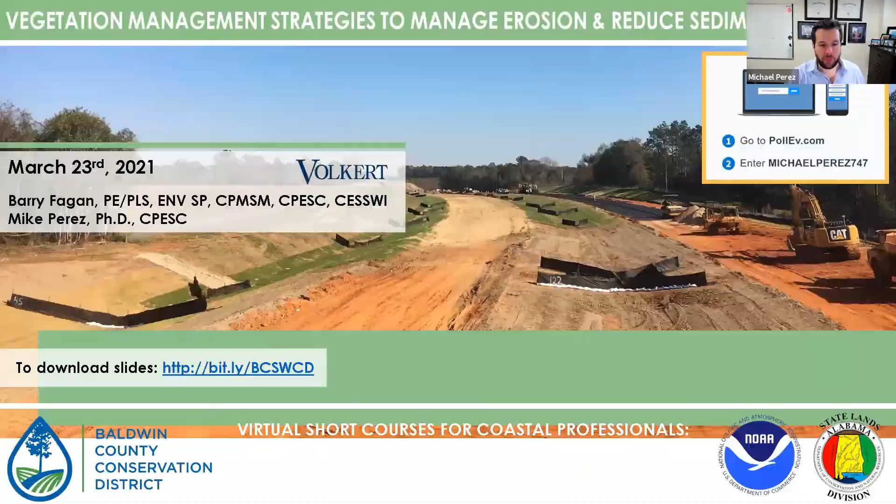So to get us warmed up with PollEv, we do have a poll question posted here, and I'm seeing on my screen that many of you have already responded. But this is just to get us warmed up. Go ahead and post where you're located or where you're joining us from, and it should pop up on this map if we get it to show up.

Barry, you might have to do this on your screen—if you scroll to the top right corner, there should be some options and you might be able to see it come live. I'm not seeing anything at the upper right. Would it be on the... Sorry, I'm not seeing that, Mike. That's all right, how about if I share my screen real quick and we'll try that.

Do I need to stop share? There we go, are you able to see my screen?

Yeah, okay cool. So I'm seeing that we've got a lot of responses, a lot of folks down in the Baldwin, Mobile County area, as expected. So great, it looks like the majority of you are able to respond, and it is working the way we intend. So that's good.

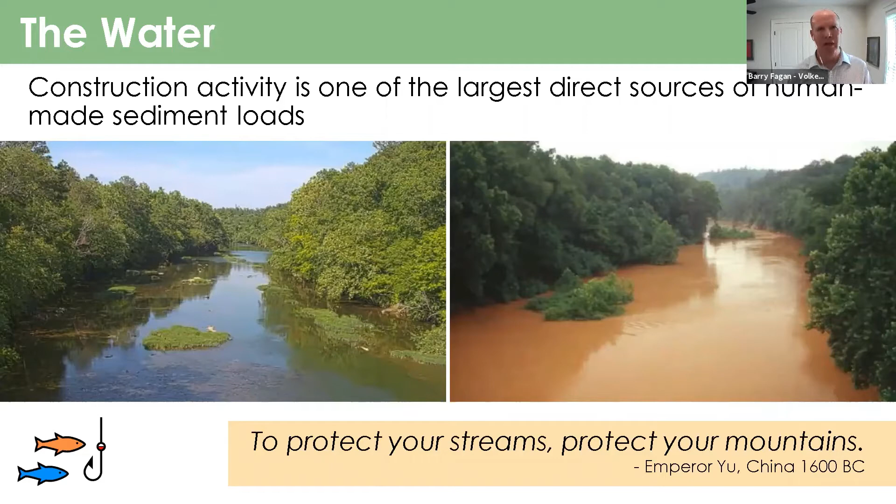And while that's a central Alabama stream, we know that we also have some issues down in coastal Alabama. We know that we like to blame the pollutants in Mobile Bay sometimes on the greater watershed and what's coming from places and people further inland, but we know we have issues there on the coast also.

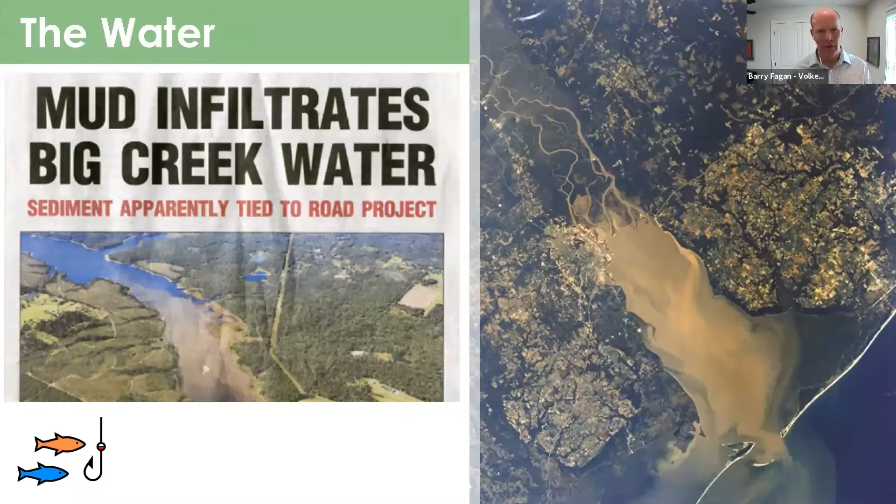So getting to the law now, the law of the land, the law of our nation is really the basis for the law is the Clean Water Act, and we're getting close to the 50-year anniversary of the passage of the Clean Water Act, and we haven't quite met the purpose for that act. You know, the purpose to restore and maintain chemical, physical, and biological integrity of our nation's waters.

We're barely getting the protection part down now. We haven't done the restoration part, and you can see the goals of the Clean Water Act to eliminate pollutants by 1985, to restore our waters to fishable and swimmable by 1983.

We missed the mark. You know, that Big Creek Lake, that drinking water supply that I just showed you, if you go fishing in Big Creek Lake, you're going to pass at least one sign that says, hey, don't eat the fish out of this place. Because of historic and past pollutants into the water supply, mercury and other pollutants. If you're going to eat...

Come close to restoring our waters to a condition that we were hoping for back in 1972.

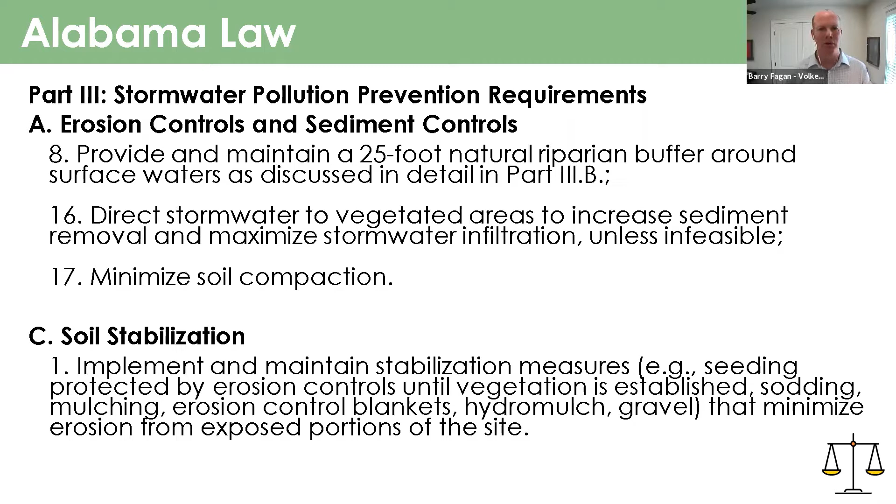It tells us to implement and maintain stabilization measures such as seeding protected by erosion controls until vegetation is established, sodding, mulching, erosion control blankets, hydro mulch, gravel. We'll talk about all of those today.

Continuing under that soil stabilization section, it requires temporary stabilization if an area will remain unstable for more than 13 days. That's not saying wait 13 days before you stabilize. That's the maximum. If you know an area is going to be disturbed and left for more than two weeks, stabilize it now.

Let's cover it up as a part of our getting out of that area. Let's cover it up now, at least with some temporary stabilization. There's really not a reason not to, but it requires some planning on your part.

And then once grading is completed in an area, let's cover it up with final stabilization right now. We can't wait till the end of the job. That's the old way of doing things, was you clear a project, you build the project, and then you come back in and stabilize the project once everything's completed.

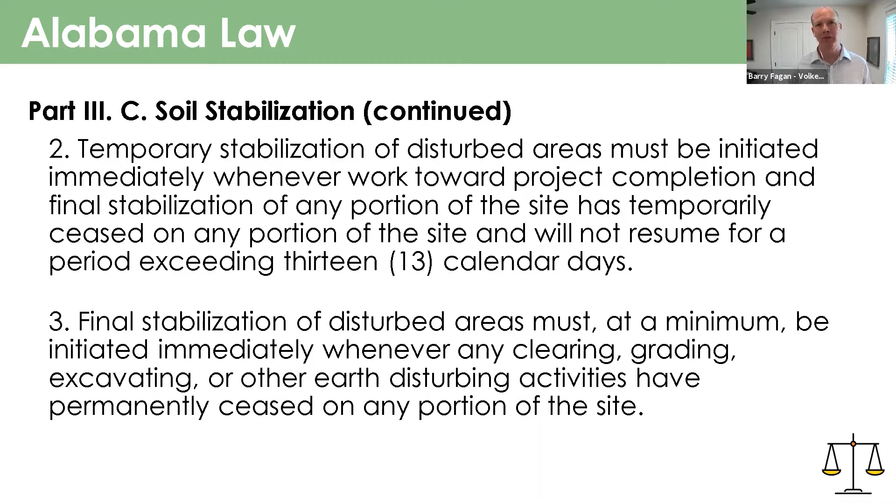That's what led to the problems on US 98 above Big Creek Lake, is 200 acres worth of disturbance and a contractor waiting till the end of the job to try to stabilize that site. We'll talk more about the concept of continuous pursuit of stabilization a little bit later.

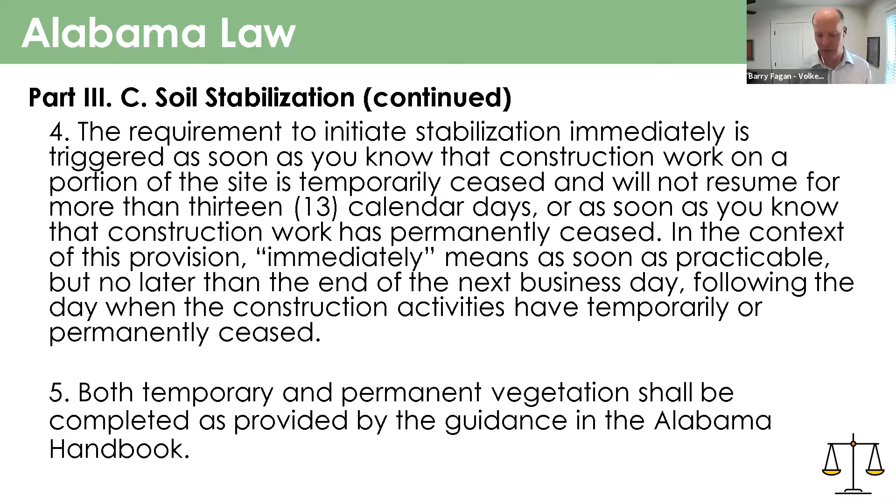So once you get the foundation for it, or maybe even the aggregate underneath the foundation of that building, you could probably go ahead and count that as permanently stabilized once you get that building started. Same way with building a roadway. You don't necessarily have to get to asphalt or a traffic stripe before you can call it permanently stabilized. It may be when you get your...

Describes, we're looking for perennial vegetation, and perennial means that the plant itself doesn't die with the season. It means that the plant lives on. It may go dormant for a season, but it comes back next year. And so a plant that doesn't live from now on, that would be called an annual plant.

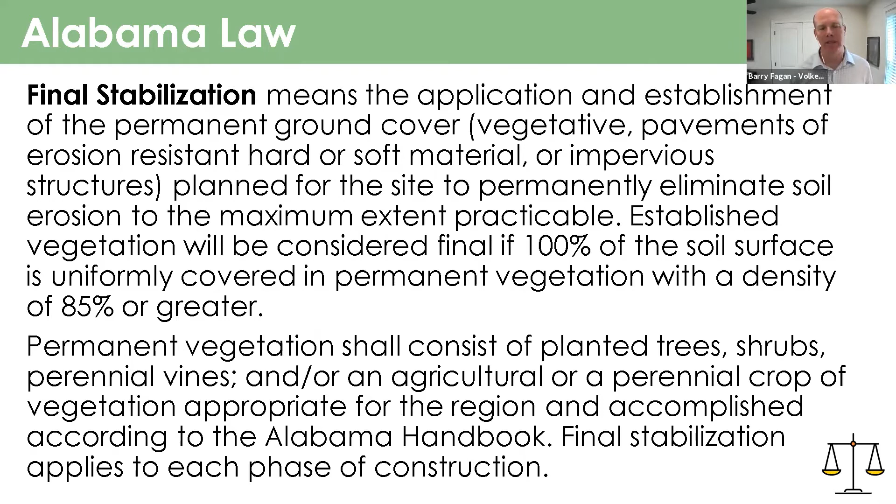If you're interested in that, you can look it up or get with me and I'll help you.

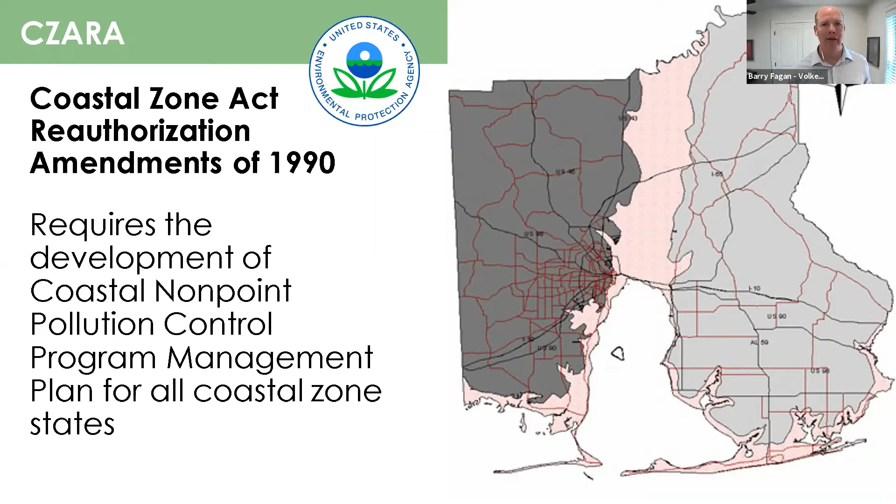There's the Coastal Zone Act Reauthorization Amendments of 1990 that have been in place for 30 years that require the development of a coastal non-point pollution control program management plan. That management plan has been in place for a while, updated along the way, and it's still in place today. A change to the new construction general permit is that the requirements of that management plan have now been highlighted and reinforced with the general permit. We're not going to get into all the details associated with those enhanced requirements for Mobile and Baldwin counties, but I would encourage you to take a look at that new permit and make sure you're comfortable with those changes related to your counties.

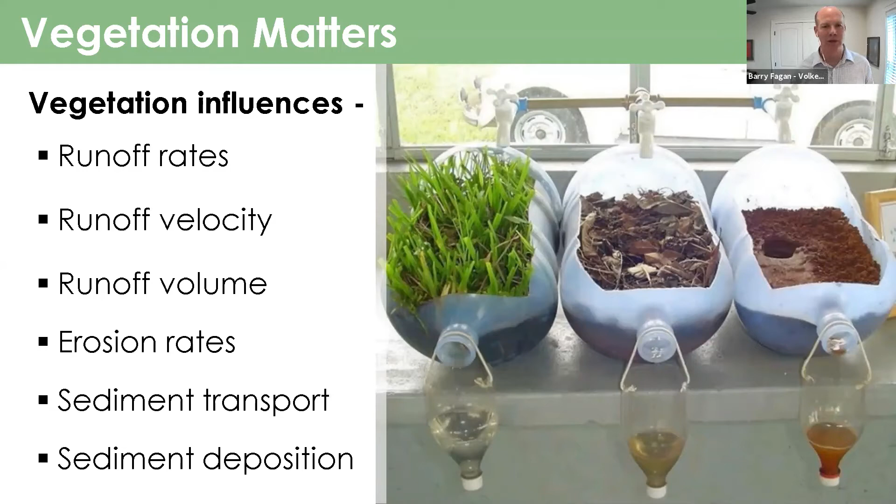Vegetation slows water, and slowing water is a really good thing. We know that just by reducing the velocity of our runoff, we can reduce erosive energy, reduce the size of the particle being transported, and also reduce the overall mass of the sediment being transported. We can increase the time of concentration, which is slowing water, and we can do that through the use of vegetation. So if we can't keep all that dirty water that's trying to leave our site, if we can just at least slow it down some, we can get some pretty good benefits just by running it through some vegetation to slow it down.

As we're trying to model the rates, velocities and volumes of runoff from a particular area, we can also see the benefits of vegetation. The runoff coefficient C in the rational method relates to the amount of runoff from precipitation received, and it changes with vegetative cover. It's a larger value for areas with low infiltration, and lower for permeable and well-vegetated areas. So as C goes down, so does Q, the rate of runoff.

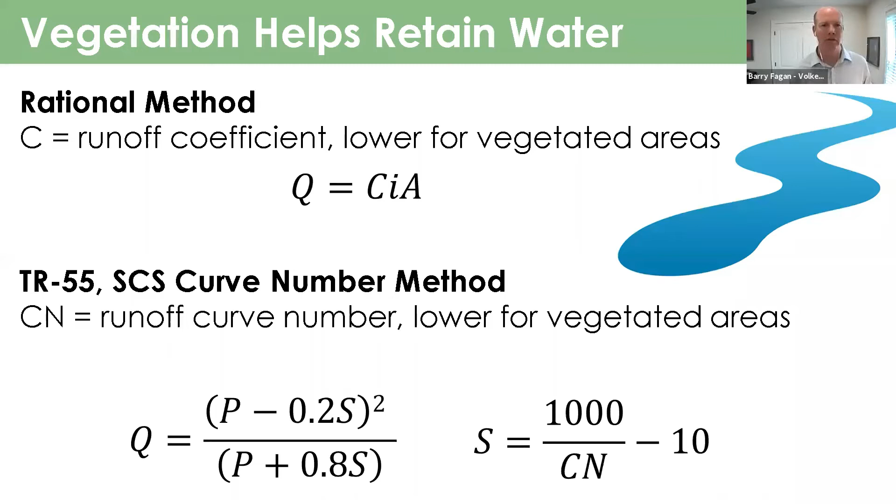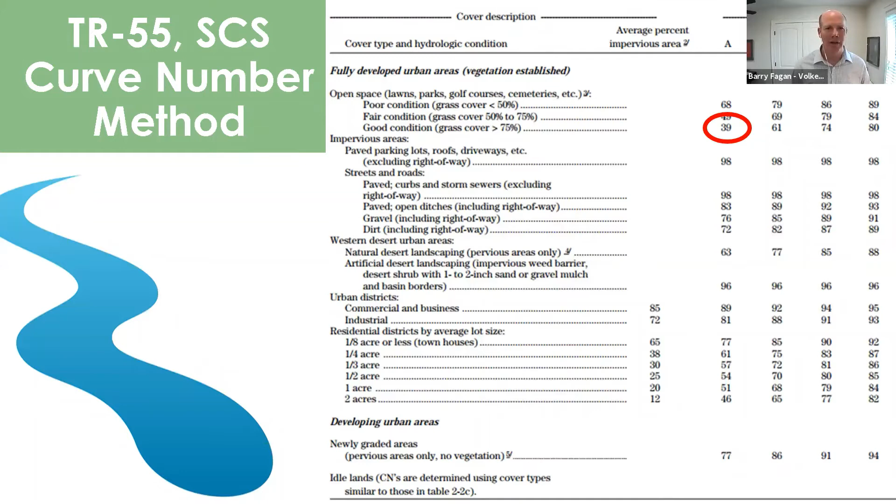Also, as we model the amount of sediment that might be leaving our site, whether on an annual basis with the Revised Universal Soil Loss Equation (RUSLE), or for a particular storm event with the Modified Universal Soil Loss Equation (MUSLE), the C cover management factor applies in both and plays a big role in judging the amount of average annual soil loss with RUSLE, or the total loss from a specific rain event with MUSLE.

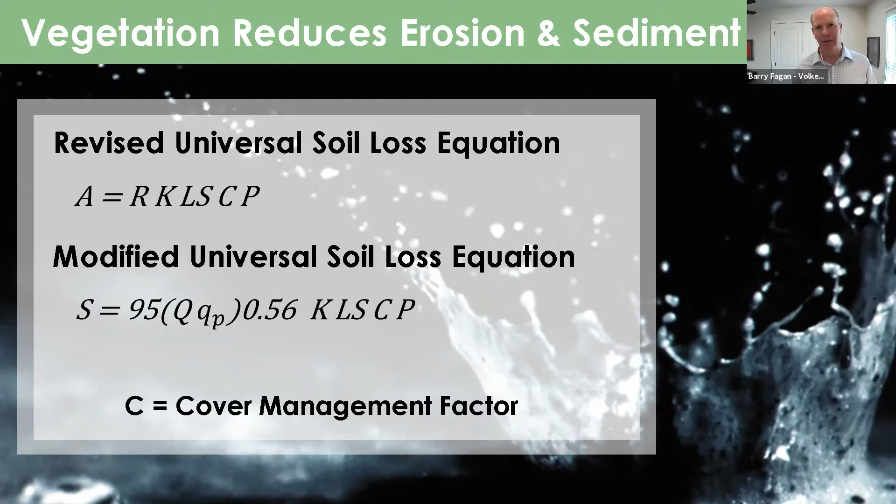C starts at 1.0 for bare land and goes down from there depending on the type of cover you put out there. So as C goes down, the amount of sediment leaving your site also goes down.

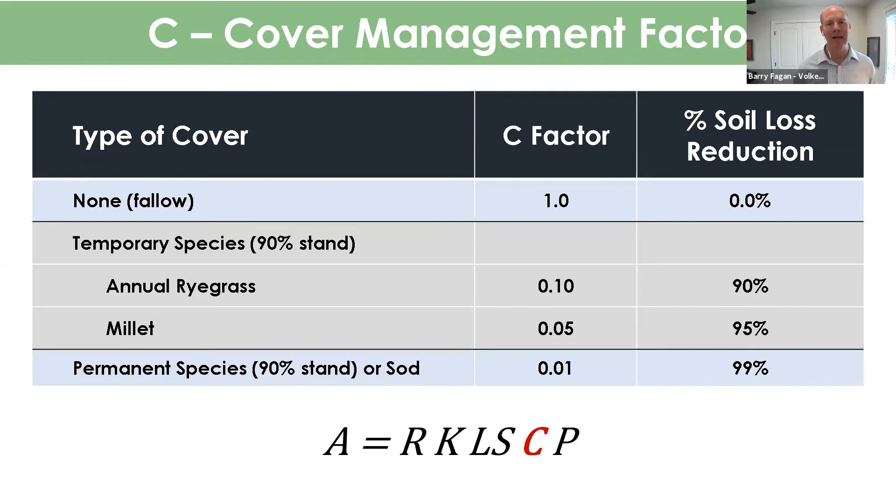That's huge. Compare your site to your neighbor's site—they're not worrying about establishing vegetation, but you've already got your sod laid on the slope. All other things being equal, your site is losing 99% less sediment than theirs.

Mike went over our objectives for today, and one of those was to explain the function and role of vegetation within a comprehensive stormwater management plan. Mike Shelton mentioned earlier that the topics of these three workshops were thoughtfully put forward, judged, and contributed to by professionals in that area.

But we have to remember it's not all about managing sediment, and it's not even all about managing erosion. Those two areas of stormwater management are really part of a bigger, more holistic and comprehensive stormwater management plan. So let's look at what that might look like.

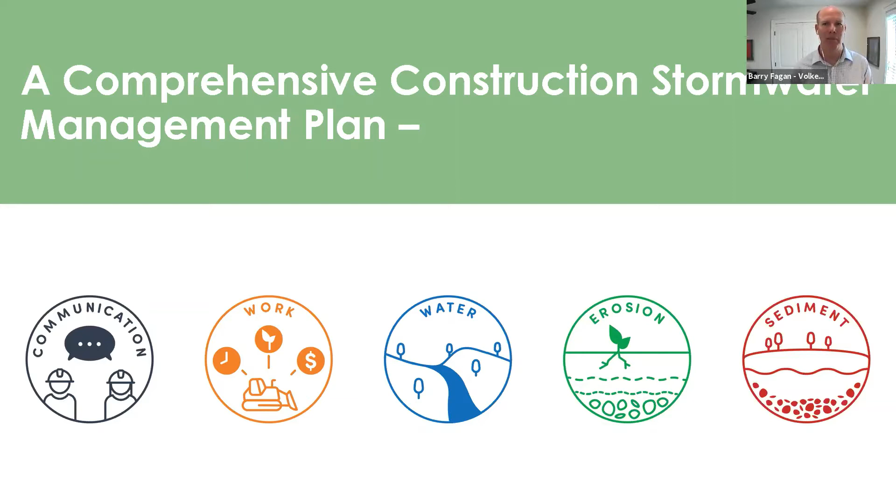It started with a focus on what we thought was the problem, but turned out to be a symptom of the problem. We saw our sediment in the creek, our sediment in the pond, our sediment in our neighbor's yard or in the church parking lot. And so we went out to...

Thank you. So we started out focusing on the symptom rather than the source of the problem—looking at sediment in the creeks and the ponds, neighbors' property—and realized that if that's all we're focused on, we'll never win.

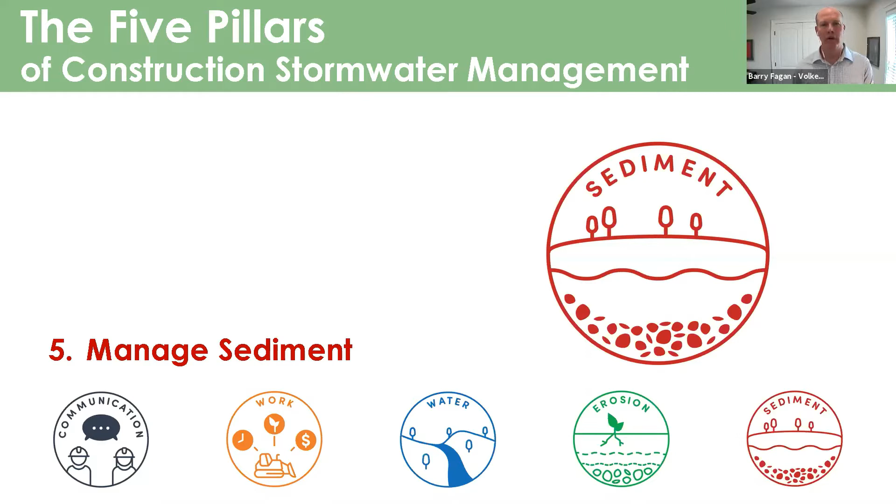And so we started looking at where that sediment was coming from. And we realized that if we could keep the soil particle up here on the slope from becoming detached, we don't have to work so hard down here to try to capture that soil particle.

And in Alabama, most of the time, it's water. And so we can tackle water by at least limiting the amount of work we have to do to those raindrops that fall on our project. So we can take the water that's coming to our project.

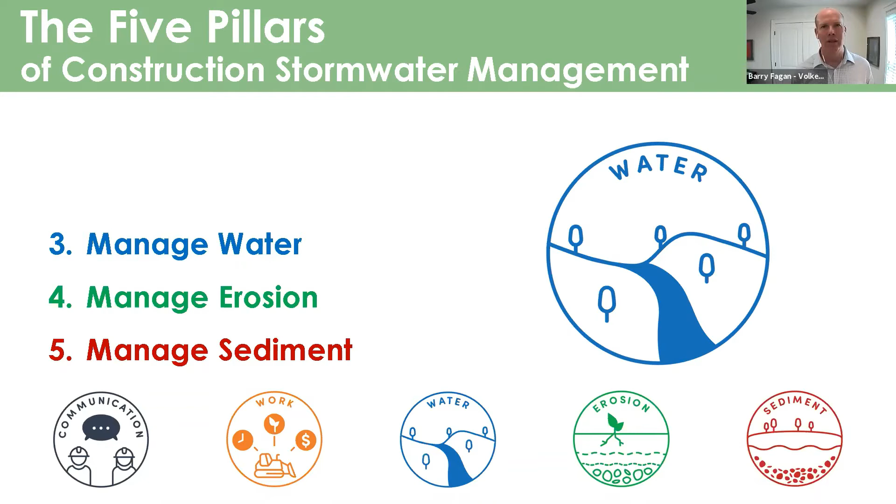To prevent the raindrop impact, to prevent the sheet erosion, and then manage the sediment that might come along with that. And then somewhere along the way, we realized that our contractors are way smarter than we were giving them credit for being. They're smart, they're innovative.

And they are willing to do just about anything we ask them to do, as long as we tell them up front as they're putting their bids together, and we're willing to pay for it, which we are. They can do just about anything we ask them to do, but we have to ask them. We have to tell them. In many cases, we have to say, this is how we want you to do this work.

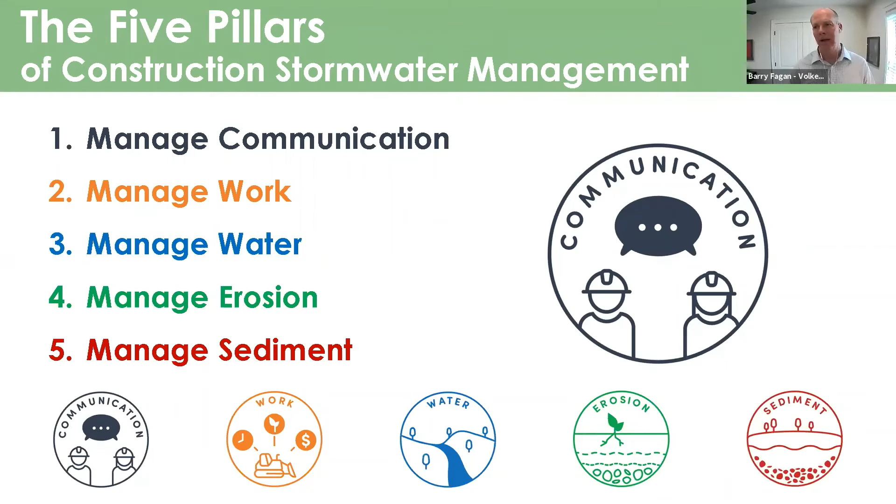And so managing communication was kind of the last thing that evolved of these 5 pillars. It's now the most obvious, but if we're not managing communication, it's going to be very difficult to be successful in these other areas. And so we call communication the best management practice we have available to us. We start there and work our way down, and it so happens that managing communication is the most effective practice we have available to us.

And when it comes down to it, if you're not doing the other 4 pillars, managing sediment actually becomes one of the least effective practices we have available. And it's also the most expensive if you're not managing the other 4 pillars along the way. And so we encourage you to adopt all 5 of these pillars and work them in order to increase the effectiveness of your managing sediment practices, and also to reduce the cost of trying to manage that sediment.

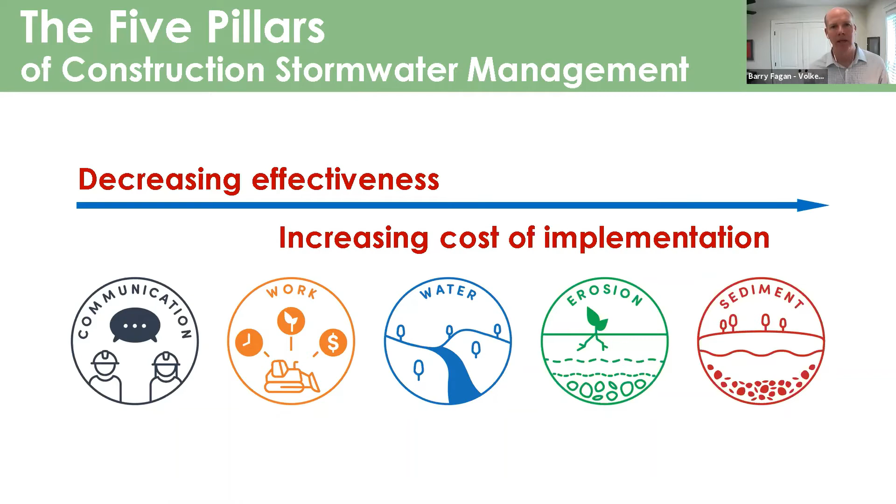So in terms of managing vegetation, with communication, we know that specifications, plan notes, pre-bid, pre-construction meetings, all of those can provide direction, they can provide clarity, they can share with the contractor what our priorities and expectations are for this project before they ever put their bid together for the project.

Managing work, the timing of vegetation is critical, and it's a part of managing the work of a project. When we choose to clear and when we choose to cover, those decisions do make a difference. And so we should choose to limit and delay our disturbance at every opportunity. We have to communicate that to our contractor through our plan notes and meetings and conversations.

And then as we get to managing water, we know that vegetation slows water down, and slowed water is good water, right? Erosion, we just saw that vegetation can give us a 99% reduction in sediment yield just by establishing that permanent cover. And then even the general permit acknowledges that vegetation can provide sediment filtering and sediment capture. We absolutely need sediment management as a part of our plan, but the work of that plan can be lessened if we're managing vegetation along the way.

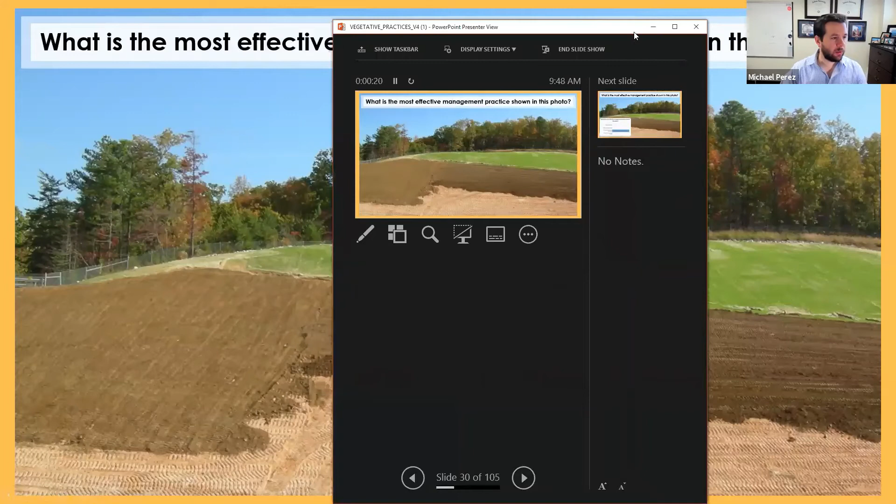All right, so the question is, what is the most effective practice shown on the screen? Is it topsoil application, vegetative establishment, limitation and delay of soil disturbance, or the rolled erosion control product that's installed?

Here you can see the results coming in from the poll, and the majority of you, about 65%, are agreeing it's vegetation establishment. But Barry, I would argue that it might be the delay in soil disturbance and the limitation in disturbance. Yeah, I was watching to see if, after you said that, the numbers would start going up for limitation. Let me get back on here and explain that question a little bit further.

So looking at this photo, taken on the Anniston East Bypass project on ALDOT several years ago. ALDOT has requirements for establishing vegetation as the work is being carried forward. So as a contractor cuts 20 feet into a cut, they have to start establishing permanent vegetation, then 20 more feet have to do the same thing. Where I'm standing taking this photo, we still haven't reached the subgrade of the roadway, but you can already see green grass growing.

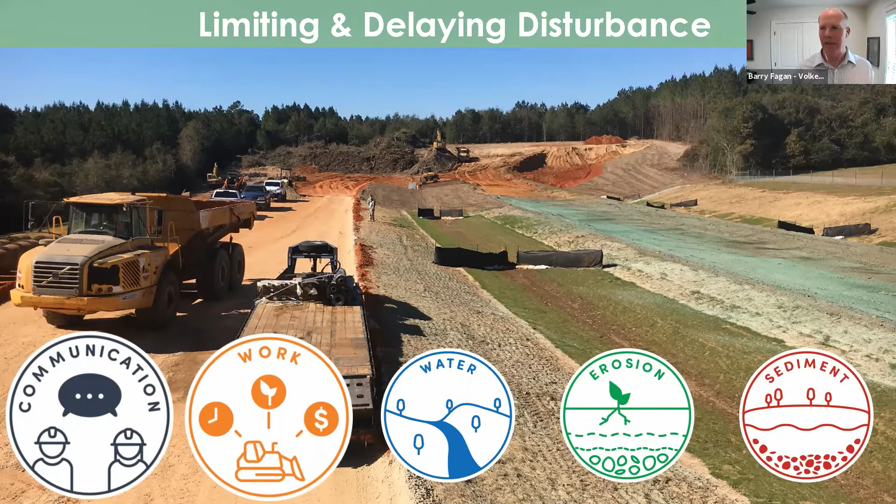So we've delayed disturbance in that area beyond the trees, and we've limited the area of disturbance here where we're working right now. Of this 15,000 to 16,000 foot long project, we only have this small area of disturbance out there, and that greatly reduces the sediment load. So not all areas of our site need to be cleared.

Now this is a roadway site. We'll look at a commercial or residential development in just a second, but you can see the area between our construction limits and the right of way. Is there a reason to clear that? Maybe if there are utilities there, or if we have to install a fence, maybe there's a reason to clear it. But I think oftentimes we just simply clear from right of way to right of way, or property line to property line, just because that's what we do sometimes.

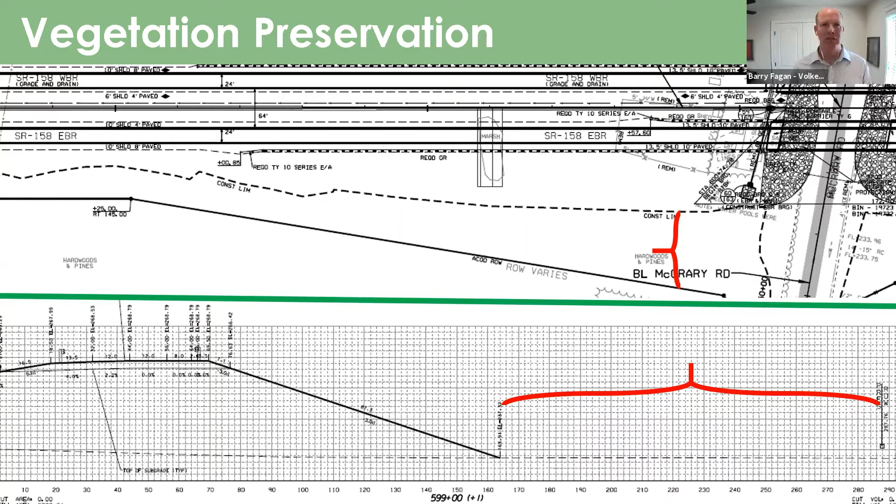But no—every square foot or half acre of established vegetation you save is sediment loss that you also save down the road. So take a look at this residential development.

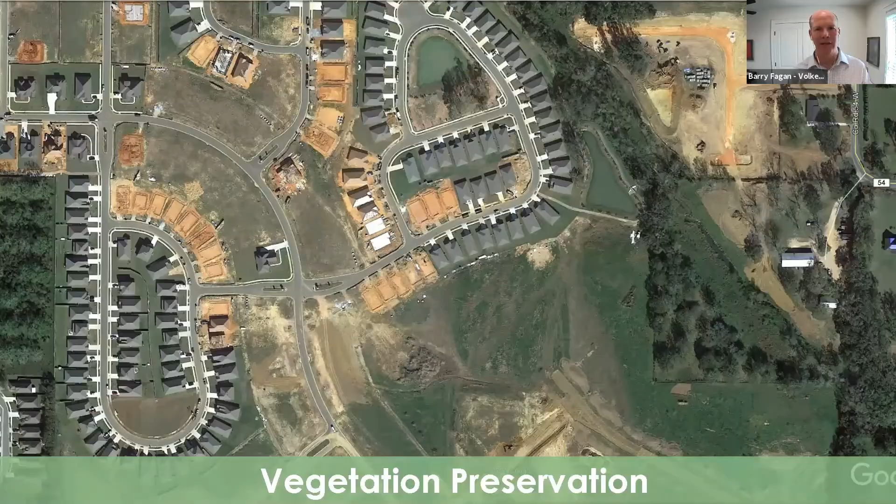It's inconvenient. This is another roadway project I'm part of. You can see we've got the jug handle roadway access road coming in from the top, and the main line there on the bottom. What do we do in that area between those two roadways? There's no need to clear that, no need to strip that whatsoever. But if we just leave it as is, we know what's going to happen.

There's a shot that I really like. Behind me is the source of soil for this embankment that's being constructed. In front of me, the contractor had a 17-acre limitation on the area of disturbance, so he cut a road through the woods to get from his cut section to his fill section, limiting his disturbance, but also delaying the disturbance of that treed area on either side of the access road.

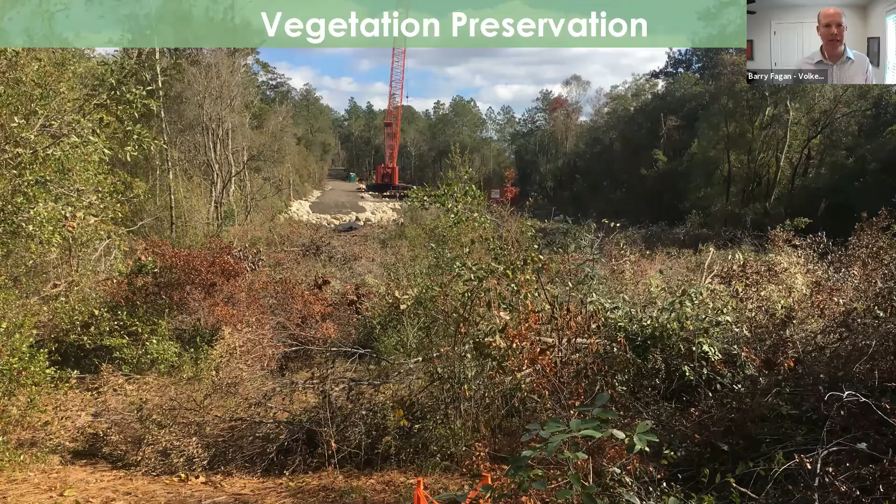There's some minimal clearing at a bridge construction site. You just get so many feet outside of the bridge overhangs, and then let that be it. There's no need to clear from right of way to right of way. So, back to communicating, we have to let our contractors know that we don't want them to clear in a certain area, and sometimes that takes signage, and sometimes it takes a physical barrier.

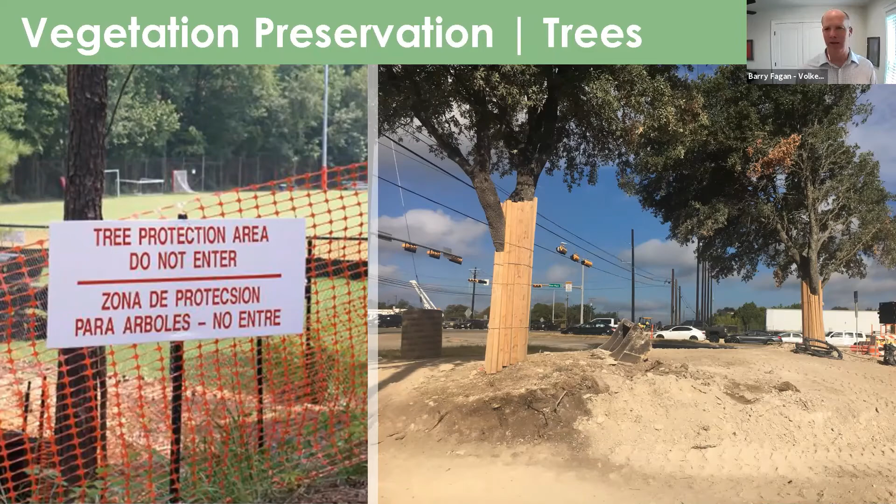I was on a project in Texas last year and noticed they were doing a really good job protecting the bark on the tree, but you can see the root systems are just completely being dug into there. I think these are some type of oak trees. I can't imagine them being okay with that type of damage. Typically we should think about preserving the roots within the drip line of a tree, and if we can't do that, that tree may not make it.

Some other factors we need to be thinking about: even if we've preserved this tree and we're not going to excavate around it, if we start parking up in there and storing materials, before you know it that tree has been damaged, or at least the root system or the soil around it has been compacted, and we have issues. Sediment deposition is another problem as it starts to build up above the roots and up on the tree trunk.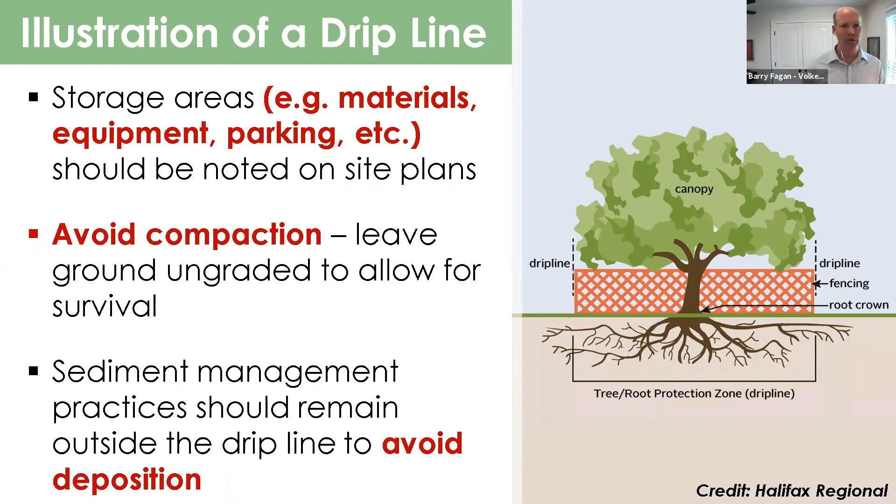One thing I've been fooled by before is contractors saying, hey, we're not going to clear that area, we're just going to go in and log it—we just want to harvest the timber, and Barry, that's a pretty clean operation. Well, it's not. Loggers can make a really big mess of a site, and what you're left with is a commitment maybe that you've made to a regulator or to some other stakeholder, and now you're left with this truly disturbed site.

Now, it's not as disturbed as had they gone in there and cleared and grubbed it traditionally, but there's still a problem there, and we'll see ruts and a lot of exposed dirt with a timber harvesting operation. There are some practices we can employ, but trust me, those loggers, they can wait.

Their operations are pretty mobile these days, and they can mobilize pretty easily and quickly, even though they'll tell you they can't do a second operation. They can.

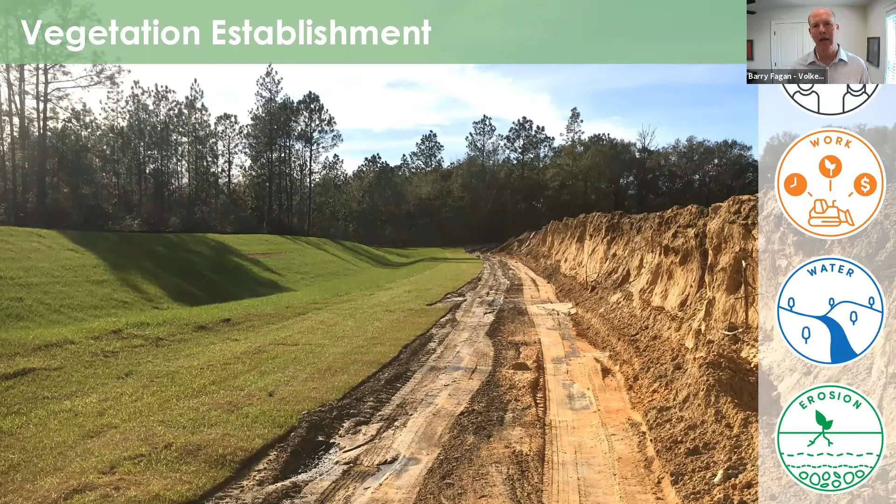They decided, let's go ahead and get this ditch graded, get our sediment controls in place, and let's cover up at least this buffer between us and that creek. And then we'll finish excavating on the right side of the road a little bit later.

As we give ourselves some cushion between ourselves and disaster, there are some considerations and questions we need to be asking ourselves during the planning and design process, and also along the way.

So what's the desired permanent species? Again, we're looking for that perennial plant. Do we need a nurse crop? Do we need a cover crop? We'll talk about those terms a little bit later.

So when is the best time to plant? Can we schedule our project to fit planting schedules? Sometimes that's not reasonable.

When I'm up north, they talk about the winter season or the rainy season, and they'll actually shut contractors and construction down during those times. We don't do that here in Alabama. We don't have a rainy season or a season that we really can't work. We work year round and deal with the elements we deal with. So we have to know.

So I'm working today at the end of March - which species can I seek to establish right now? Or if I'm in August, which species do I need to be looking at establishing at that point? Are our soils suitable? Have we done some testing to see if our soils will actually maintain? We can get grass to grow just about anywhere in Alabama, but it may not last very long if our soils aren't suitable.

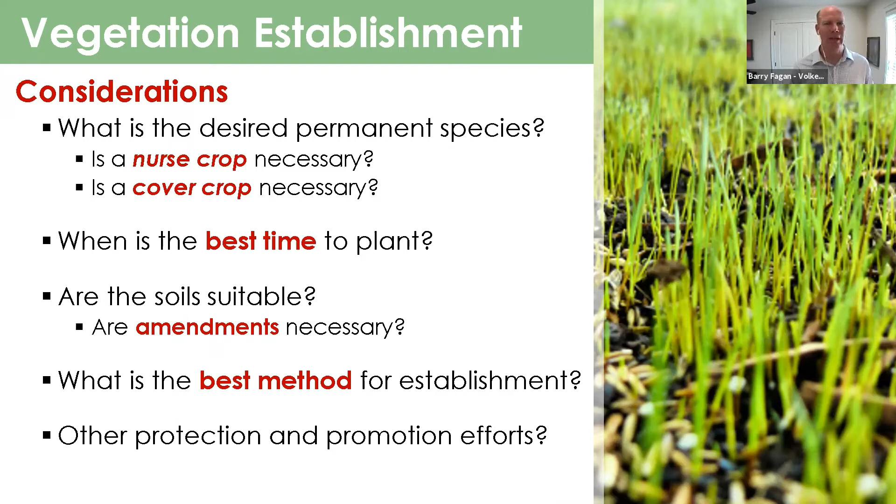And then also ask ourselves, what's the best method for establishing that? We'll talk about some of those methods of establishment in a little bit. Like I said, in Alabama we have pretty good climate, pretty good soils. Topography can be a challenge, heavy rain can be a challenge, sometimes periods of drought can be a challenge. But on average, we have some pretty good conditions for growing grass.

So with climate, we think about average temperature and rainfall. With long-term land use, we're thinking about the appearance. Is this a front lawn of a Taco Bell, or is it the front lawn of my house, or is it 300 feet off the roadway? What kind of traffic is going to be on this slope?

Are we just going to be mowing it, or is there going to be foot traffic? How often are we going to mow it? Do we want to - do we need to maintain a certain height of vegetation, say in a solar facility, large scale utility scale solar facility - that will influence the type of vegetation we try to establish, and then our soils and topography.

If we're dealing in sandy soils, we may not want a clumping type of vegetation. Maybe we need more of a creeping vegetation, so we're not creating channels for the runoff to go through and carry that sand. All of those things come into play, but the good news is we don't have to make all those assessments ourselves - there's some really good resources out there.

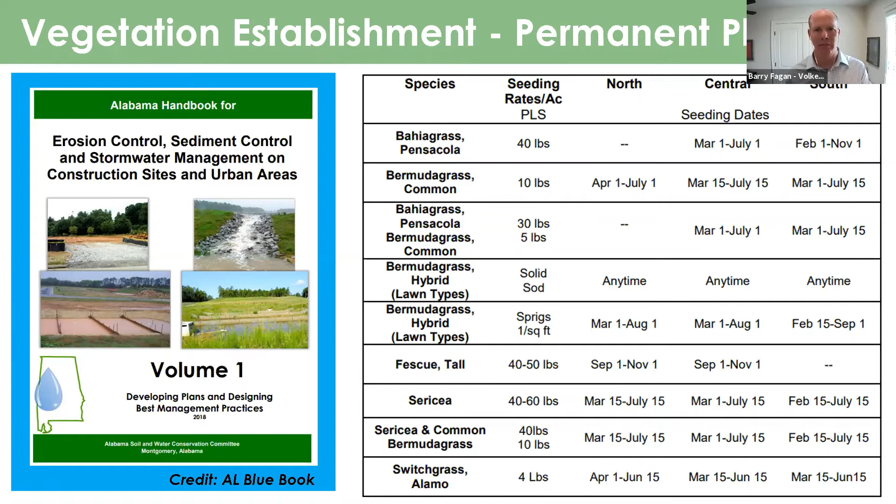But those aren't often established by seeding. I tried to establish centipede once by seeding and went back to sod pretty quickly. Notice that there's a north, central, and south column over there on the right side. You're obviously in the south part of this table.

And so there's not just a region, there's also a planting date as part of this, and then the rate of seeding goes along with the species and plant selection also. One thing to note, if you look at Bermuda grass, it can be established just about any time of year by solid sod, or by sprigging February through September. There's some species like tall fescue you could probably establish in your area right now if you planted it, but it wouldn't last there very long.

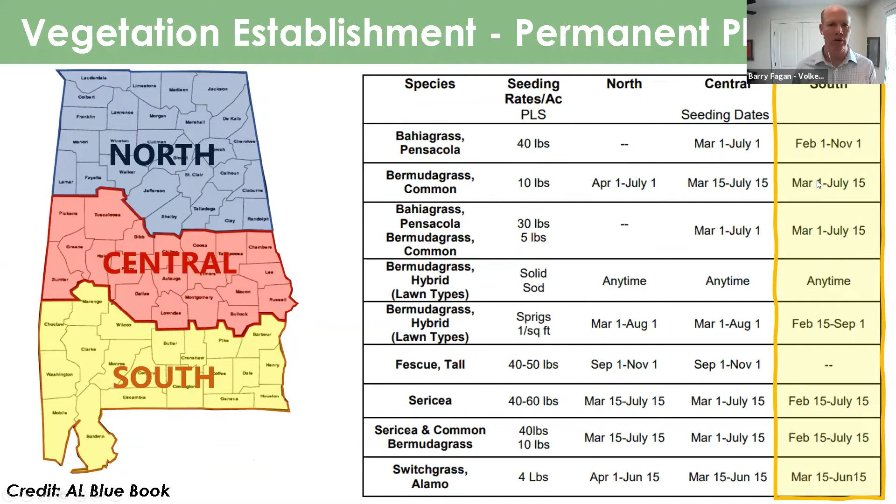Also notice that there are some gaps in here. We've got March to July 15th. So what do you do if you want common Bermuda grass planted and you're at August 31st? Well, you're going to have to establish some type of nurse crop to help hold the world together until we can get around to a decent season.

At my last house, we had about 2.5 acres, and part of the yard was really shaded. My kids didn't run around in that part of the yard very much, so I planted centipede there, while the rest of the yard I was able to plant and establish Bermuda grass. That worked out fine for me. I didn't have to mow the centipede as often, and the kids didn't tear up the Bermuda grass, but it was a little bit more expensive to do that in the shady areas. So economics play a role in your plant selection also, and Mike will show us some cost information a little bit later.

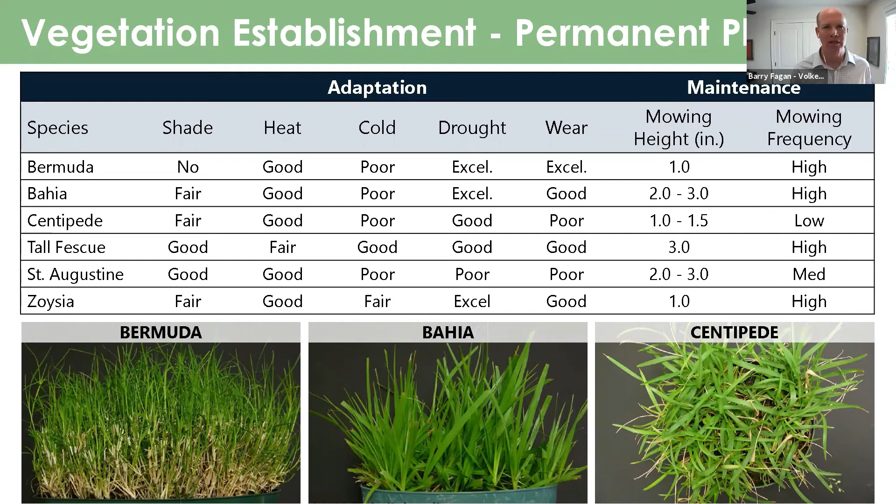Another good resource for selecting plant species is the Alabama Department of Transportation specifications. You can do a quick search to get to the specifications, and then another quick search within the PDF spec book to get to vegetation establishment, or seeding, I guess is probably what it's called.

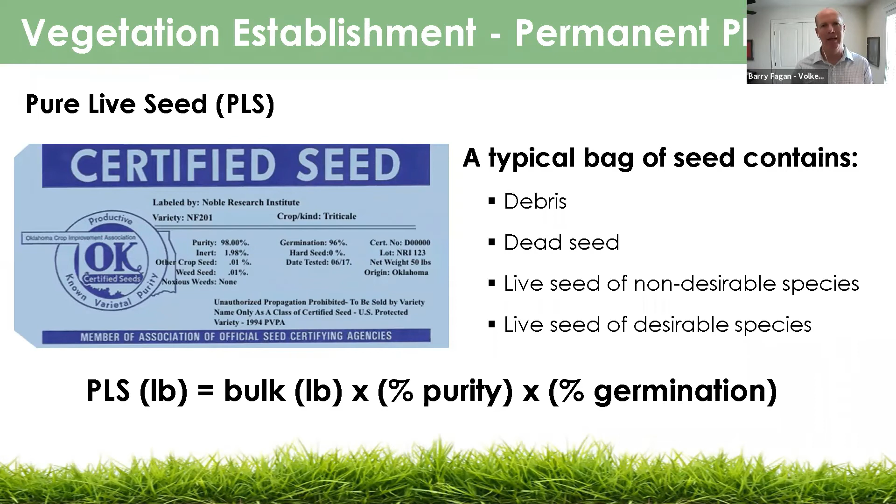You'll see on the seed tag that for this particular seed analysis, the seed was 98% pure in that bag—meaning 98% was the seed we were looking for. The germination percentage is 96%. So of this bag, 98% is what you want, and 96% of that will actually grow. We multiply our bulk, our mass, pounds of seed in the mix or bag, times our percent purity, times our percent germination.

I want you to do that quickly, looking at this seed tag with 98% purity and 96% germination. How much pure live seed is in a 50-pound bag? I'll pause a second while you do that calculation. It should be a quick calculation—it should have taken you longer to get your calculator than to do the math.

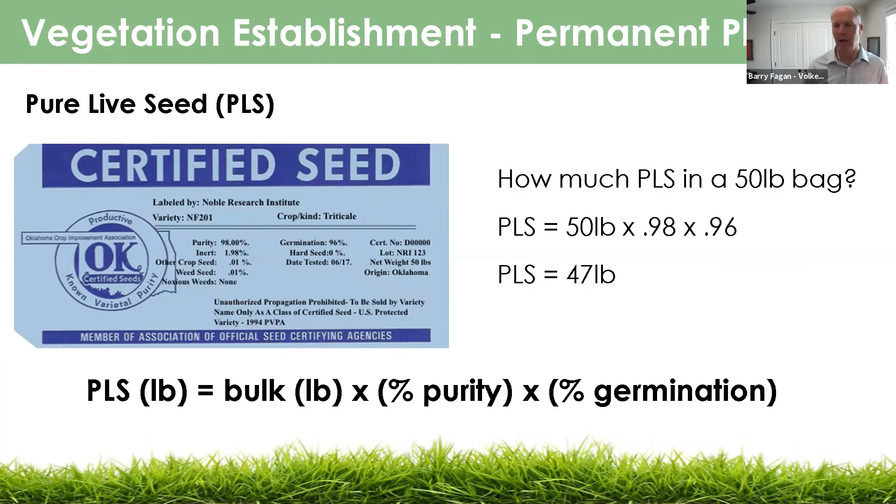We know that we multiply the bulk, the pounds of seed in the bag, times our purity, times our germination, and we get 47 pounds. These numbers, 98% and 96%, are pretty good numbers—maybe as good as you can get. But when we start seeing those rates get down into the 80s, it can make a really big difference in how much money you spend. If you're paying the same amount for this particular seed as for a bag with, say, 80% purity and 78% germination, then you're not getting what you paid for. You have to do your calculations to make sure your economy is working out.

So we talked about nurse crops and cover crops earlier. Just to clarify, nurse crops hold the world together while the permanent plants are being established. We may need to supplement a mix—if we've got a slow growing plant, we may need to supplement with something more fast growing, but that will die out as the seasons change and temperatures warm up. Those can also be knocked out with a herbicide sometimes. You get the ryegrass going, get the root system in there along with the other permanent species, then knock it down with a mower or herbicide, allowing maximum sunlight to reach your permanent plant.

Cover crop or temporary seeding is used in lieu of permanent planting. In those seasons or situations where you either don't want to or can't establish a permanent plant, you can put a temporary species out there, or a cover crop or temporary seeding, again just to hold the world together until you can get to that permanent planting.

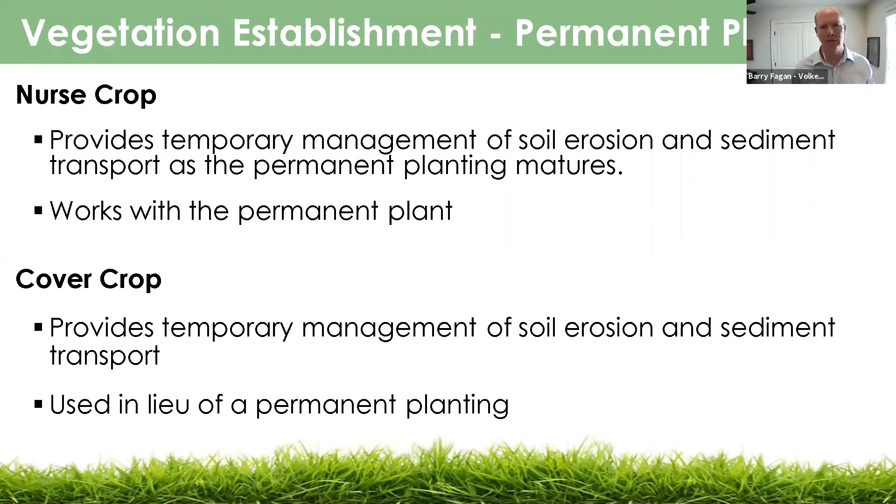I just noticed Perry gave us a comment. He said, also beware of seed testing dates, germination decreases with time, especially when improperly stored. Thank you for that, Perry. Yeah, that's my kind of luck, when they see me drive up in the parking lot, they go to the back of the warehouse to get my seed bags. But Perry's exactly right, take a look at the testing dates on that seed, make sure you're not getting old seed, because germination rates do decline over time. Thank you, Perry, for that.

It's cheap, it's easy, it grows really fast, it gets you a good green look really quickly, but then it seems to hog all the sunlight and the nutrients, and it makes it tough to get the permanent seed to come up from underneath or after the brown top millet is out there. I was in Birmingham yesterday and saw a slope where, probably two years ago, I saw brown top millet just covering the slope, and that slope today is still really struggling to get the permanent stand. We actually stopped including brown top millet in our seed mixes at Alabama about 10 years ago, because of overuse and a tendency to shade out those desirable plants.

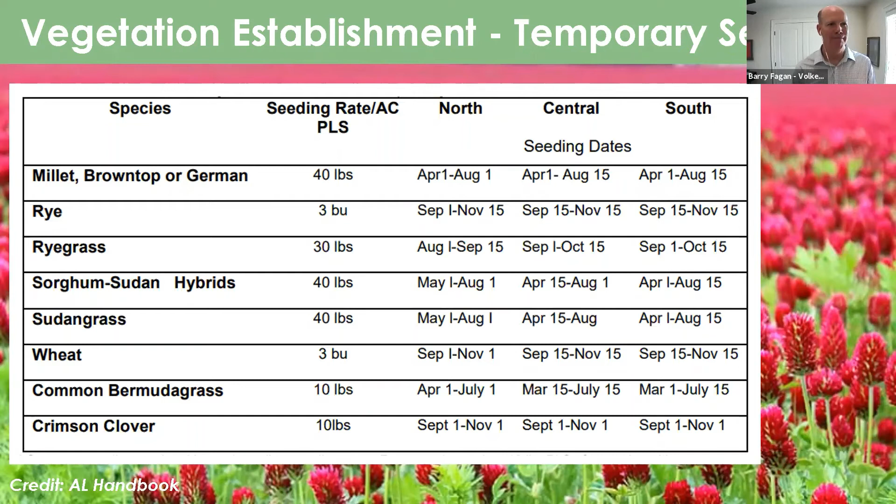He explained that it's an annual plant, so the plant itself dies at the end of the season, but it's also a reseeding plant. So the plants I was seeing were brand new, they emerged from seed from clover in the past. Not all clover is like that, some clovers are truly perennial, but if you're curious like I was about seeing crimson clover on this list of temporary seeding, that's the explanation. Thank you, Earl, for clearing that up for me and for everybody else on this call.

We lost you as you started talking on that slide.

So in the wintertime, when we had to get it covered up, we put out a temporary seed mix with some permanent species included. We put some unhulled Bermuda seed in there along with some Bahia grass, and in theory the ryegrass dies out and the permanent seed comes on through. But the problem here in Alabama is there's a little bit of overlap. So we kept watching starting in March, knowing that if we were going to have to overseed or seed and stubble this area again, say our permanent species did not come through, we needed to do that in the March, April timeframe.

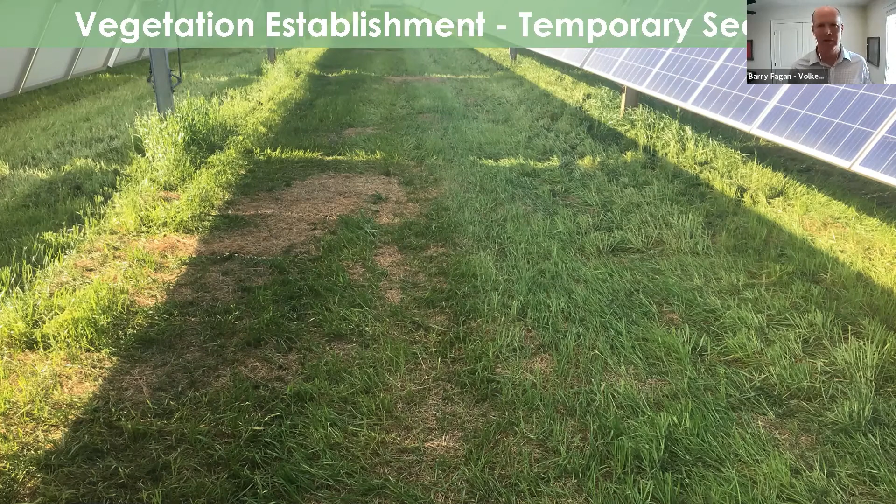But the problem is we couldn't get the ryegrass to die out fast enough to see if we were actually getting the emergence of the permanent species. So we mowed it and looked at it week after week. Eventually we started seeing some Bermuda starting to pop up.

It's hard to see, but these finer blades of grass down at the bottom, that's Bermuda starting to pop up. We've still got the ryegrass, but the permanent species were not coming through everywhere, so we had to come in and basically start from scratch, scratch up the surface and reseed our permanent species.

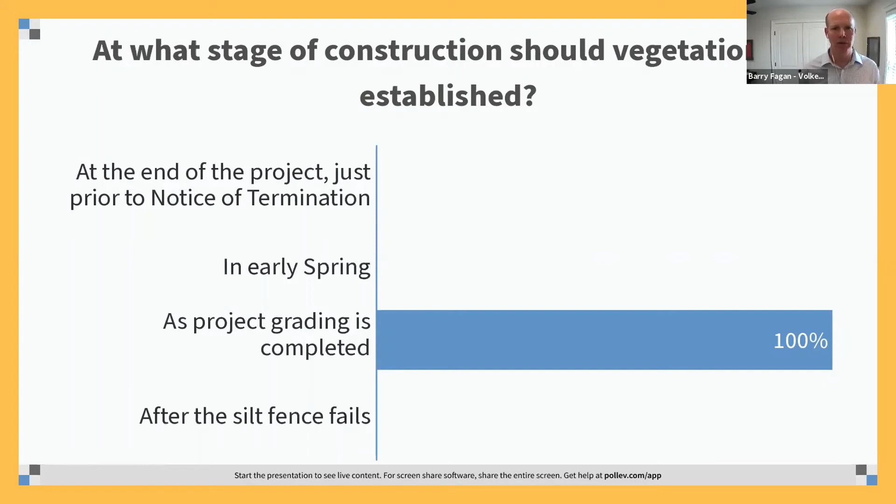Barry, I saw a question come in. Tracy's asking, how long can you store seed? When does it start to go bad, and when do you have to think about replacing the seed if it's been stored too long? That's a great question, but honestly I don't know the answer. Maybe Perry or Earl could weigh in on the chat box, that would be helpful. Hopefully we'll get you an answer soon, Tracy. For some reason I'm not seeing those questions in my chat box, but okay, I did see a comment from Earl that says temporary is an enemy. I appreciate that—all right, let's keep rolling.

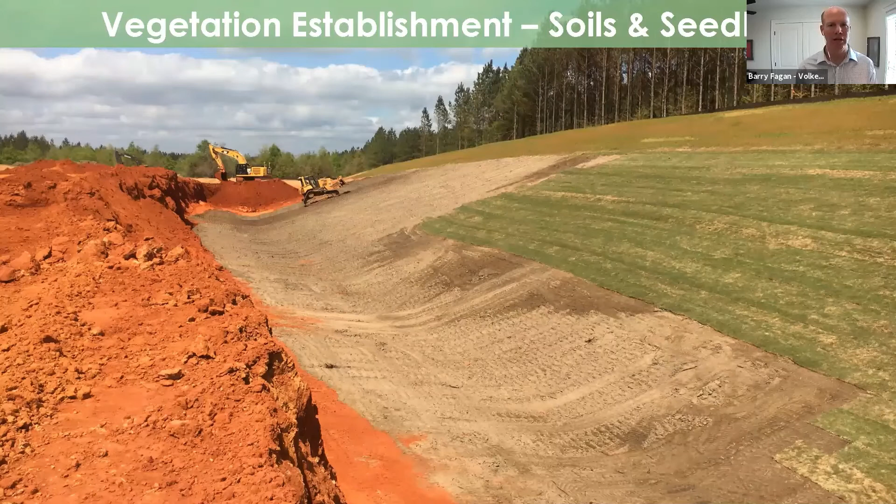That topsoil we know is good topsoil because it's been sampled and tested, and that effort pays off. We know topsoil is typically less erodible than the subsoil, and you can see in this area where we stopped our topsoil application and vegetation establishment efforts, the erosion on the left side where the subsoil is exposed. On this project, where we have ample amounts of topsoil, we use that topsoil as an erosion management practice.

All right, so let's talk about soil. One reason topsoil can be less erosive than subsoil is that it's an aggregate, a mix of different types, shapes and sizes of materials and particles. There are rocks, roots, organic materials, sands, silts and clays, all loosely bound together to create this aggregate that's typically less erosive than your subsoils.

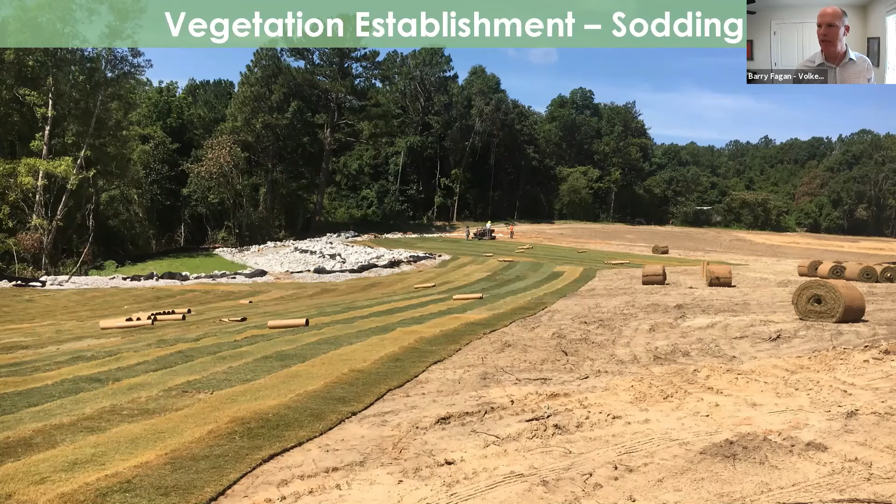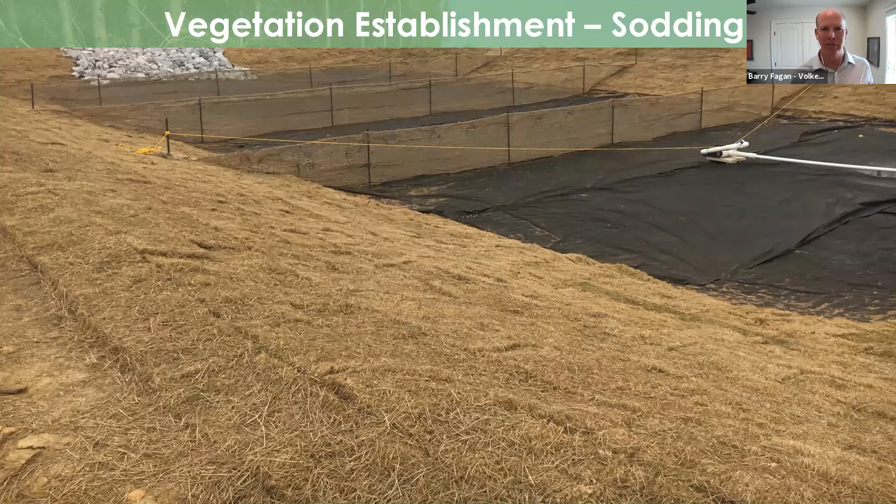So making that decision between sodding and seeding is a real thing. It's an economic versus cost versus benefit analysis that we have to run through. Know that you can get sod any time of year. This photo was taken in January after this sediment basin was constructed.

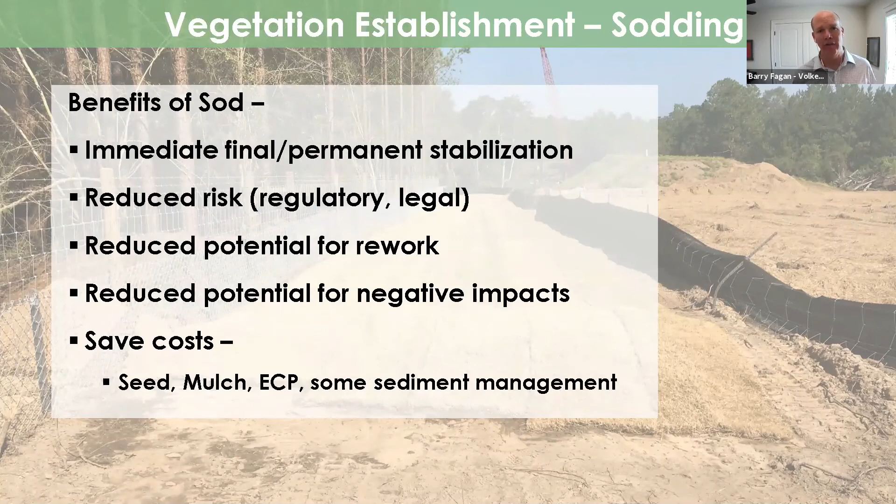Benefits of sod: immediate stabilization, reduced regulatory and legal risk, reduced potential for rework, reduced potential for negative impacts. And there's some cost savings. If you apply solid sod, you don't have to worry about some of the other things that you might have to worry about if you seed. Sod's going to have to be watered - we need to take that into account.

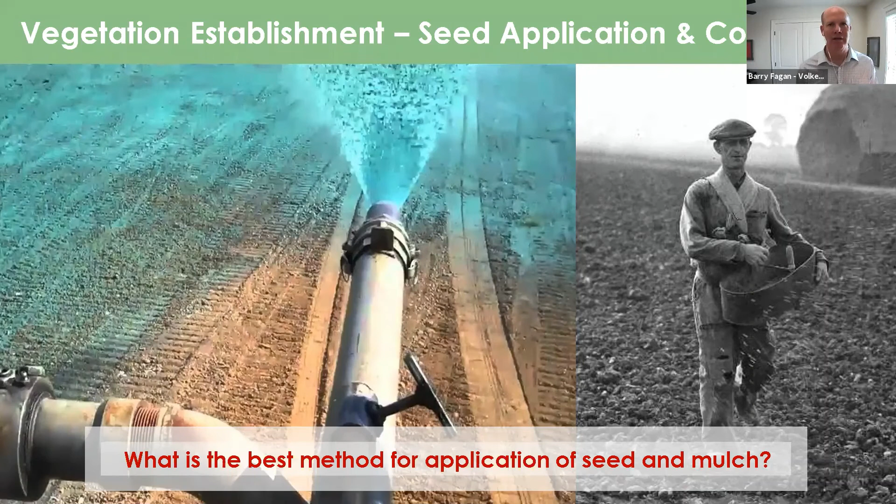But if we go with seeding, then how do we get to the proper application of seeding? My preference is to let the contractor decide how he gets the seed on the ground. Have some performance standards that make that happen. There's several ways to apply seed: a traditional broadcast or cyclone type seeder, or we can blow it out.

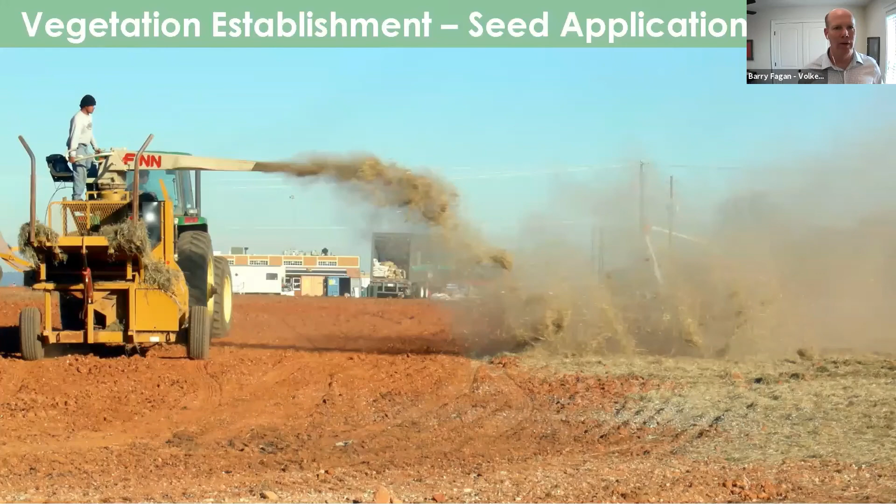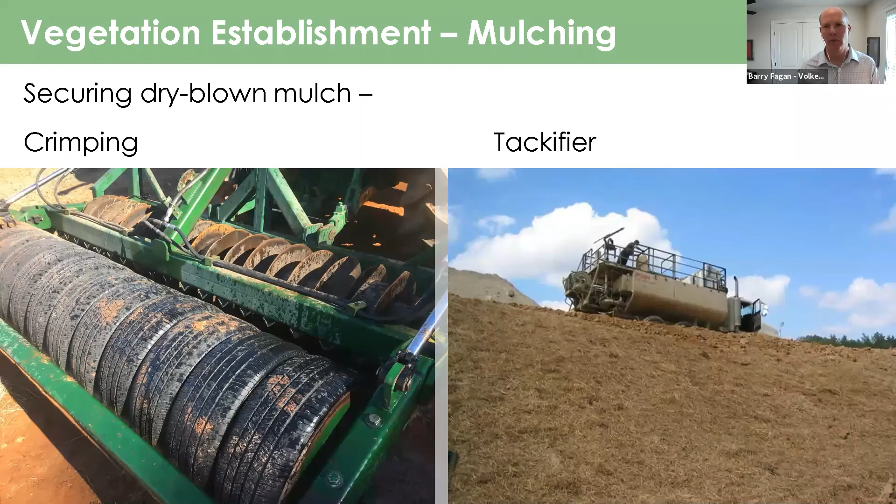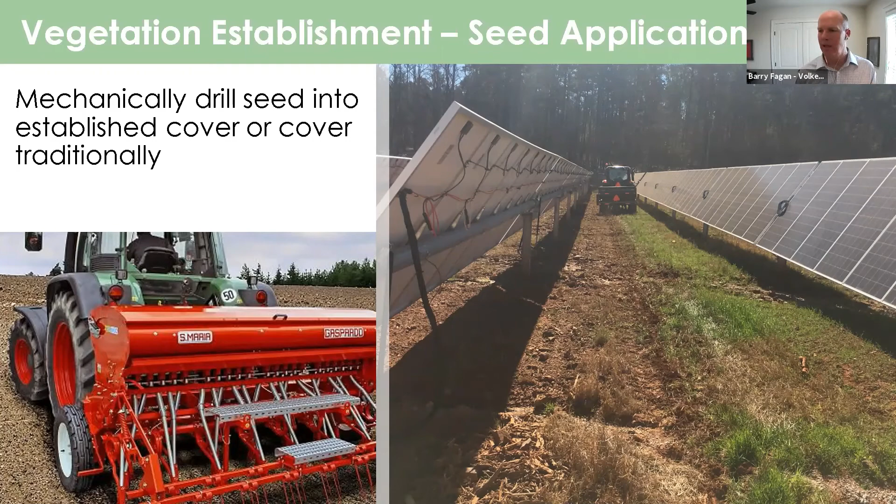Most of the time we see crimping in Alabama, but sometimes we don't have to have mulch. If we're planting into an existing cover, we can do that with a drill seeder. This drill seeder punches a hole in the soil, basically puts an indentation in the soil, drops seed in at a certain rate, and then covers up and compacts on top, providing a pretty good cover that way.

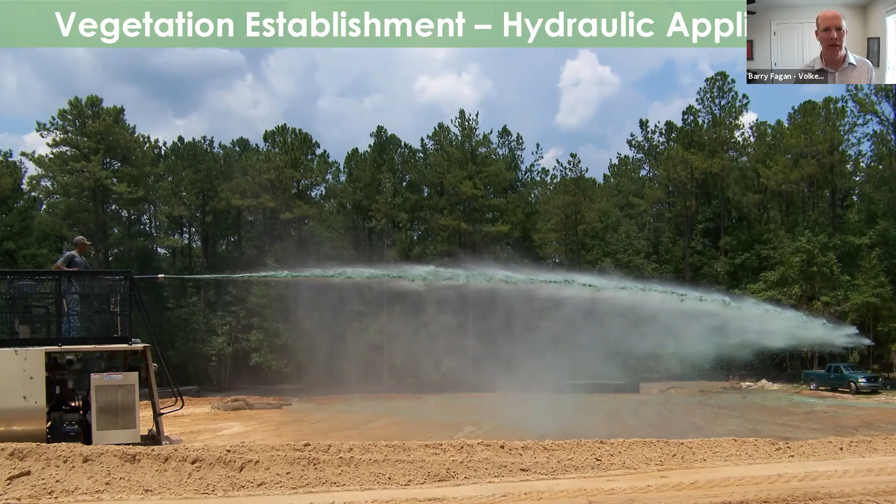Seed and mulch can be applied as a slurry through hydraulic application. Seed can be applied, mulch can be applied hydraulically, or they could be applied together. The tanks can be mounted on trucks, trailers, or a Morooka, shown there on the right. So which is better?

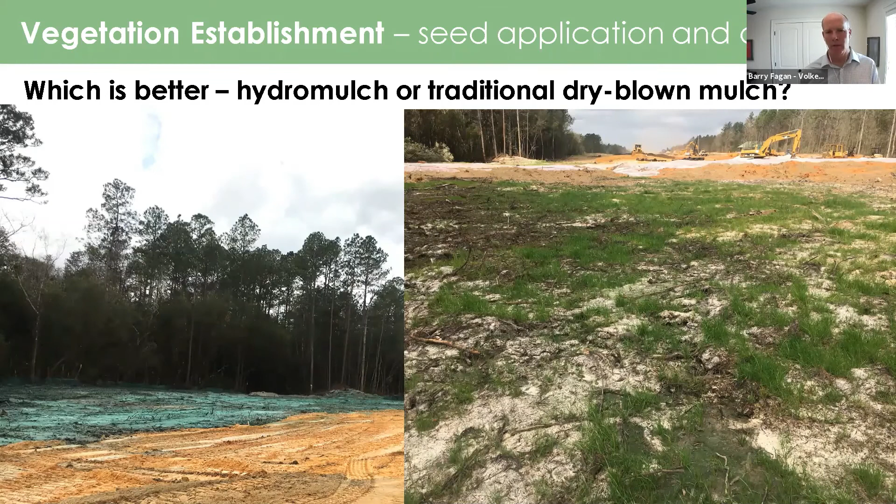Personally, I like dry blown mulch. I've had the opportunity several times to see those applied side by side. This particular solar farm is one example. We were doing it both ways, and after a while the mulch starts to lose its color, which is not a problem, but you also start to lose the mulch over time. This photo is the same area in both images. The photo on the right was taken last week, a few weeks after it was first applied, and the mulch is all but gone. That's hydro mulch there. I have to think that if we had a 2-ton rate per acre, some of that dry blown mulch would still be there.

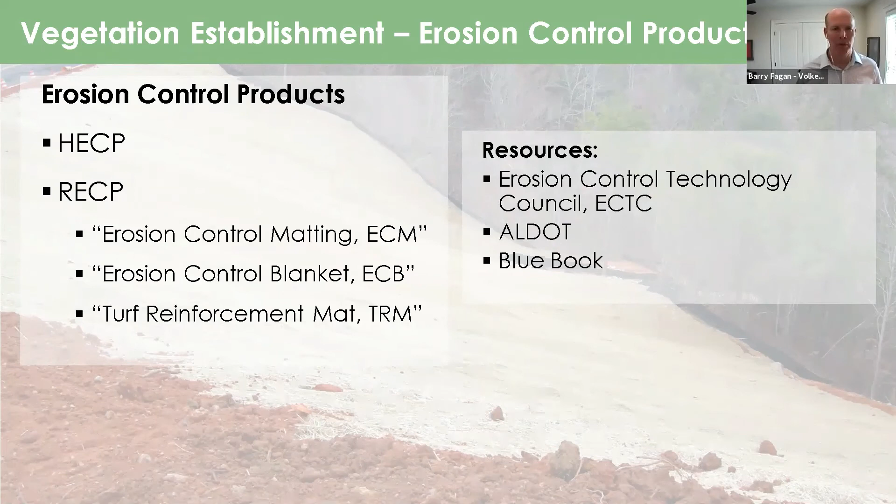So hydraulically applied mulches are considered an erosion control product, just like a rolled erosion control product. And with rolled products, there's a lot of terminology out there, sometimes conflicting - erosion control matting, erosion control blanket, turf reinforcement matting. I call them all rolled erosion control products, and then they're categorized based on what system you're using. It might be the Blue Book, the Erosion Control Technology Council, or ALDOT's system. I particularly like ALDOT's system because it's just logical.

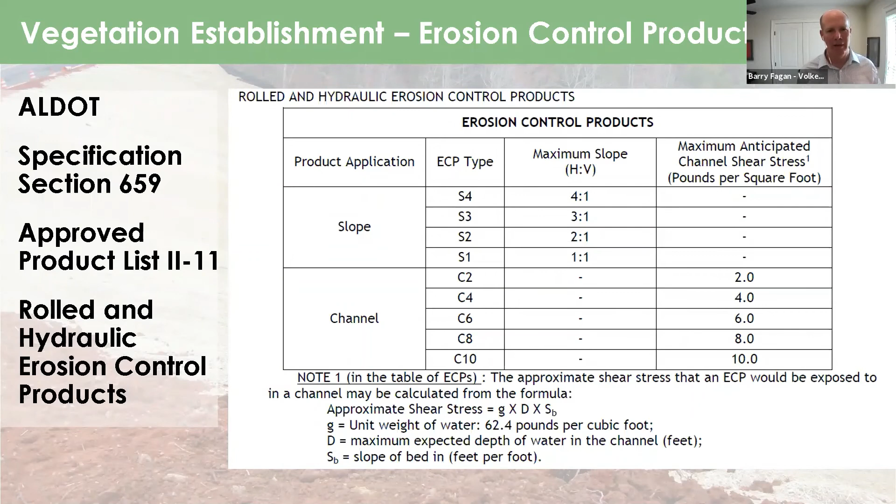So a type S3 is intended for slopes with a 3-to-1 maximum slope. A C6 is intended for channel applications where the maximum anticipated shear stress is equal to or less than 6, and there's an easy calculation to get to that shear stress. I like the terminology and classification of ALDOT, but you use whatever makes sense for you.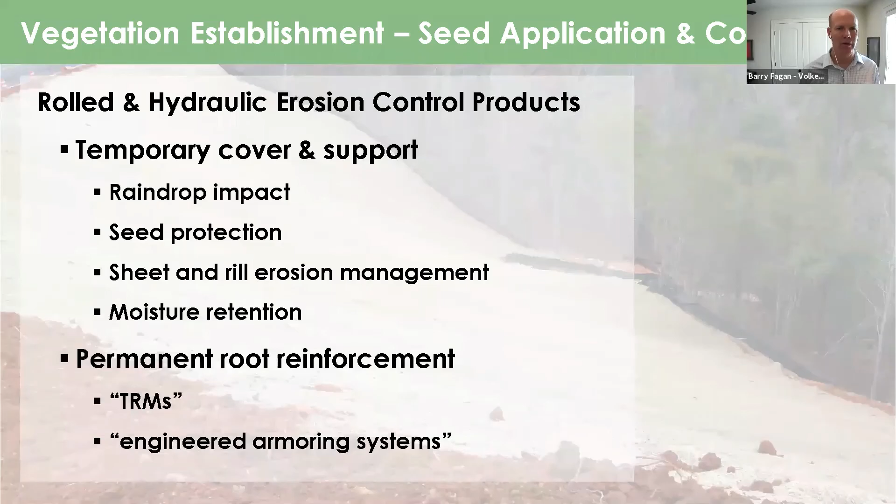Rolled and hydraulic erosion control products provide temporary cover and support, raindrop impact protection, and seed protection. Once we get into permanent root reinforcement, those products are called TRMs, or engineered armoring systems, and they're intended to reinforce the roots below the soil. There are manufacturer-specific requirements for installation, including check slots. This contractor had a pretty good little tool to create the check slot on the sides.

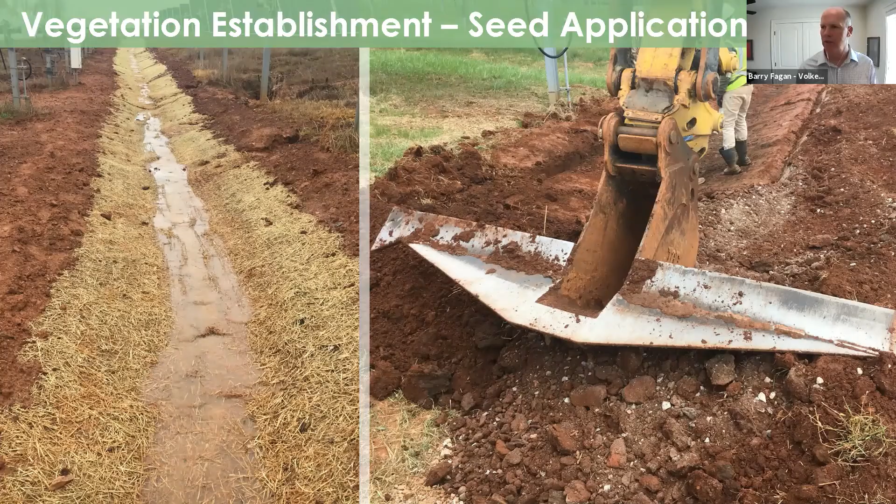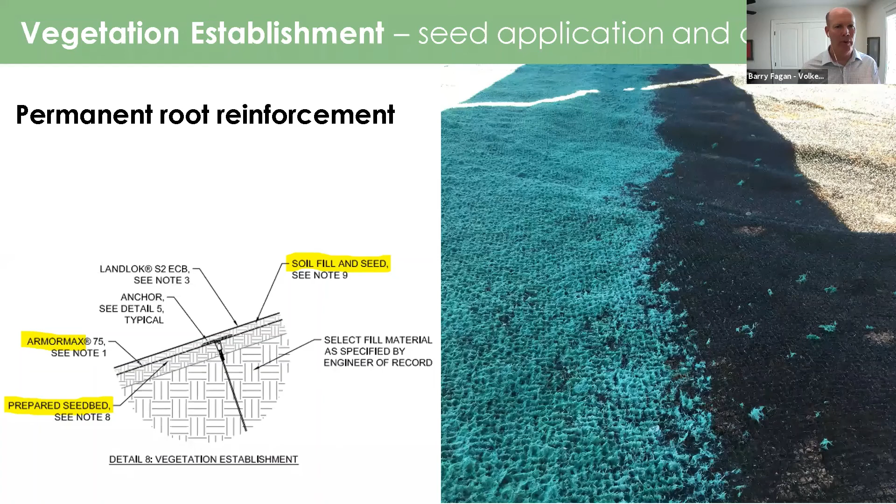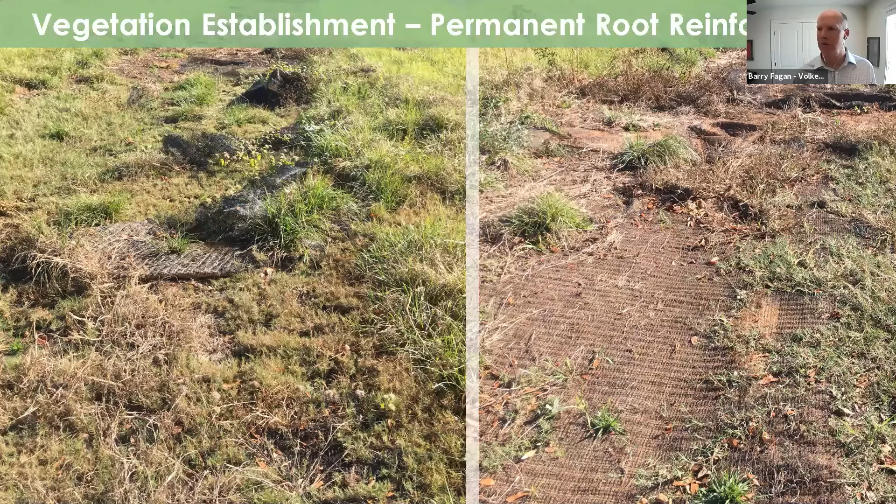I'm going to run through one quick thing here. We need to make sure that if we're using a TRM, we put soil on top. There should be soil or some type of infill, and then soil on top, and then the grass grows in and through and under the matting. This is what happens if you don't - you've got this permanent mat sitting on top. It inhibits grass growth, and it's going to make it hard to grow grass and mow in that site.

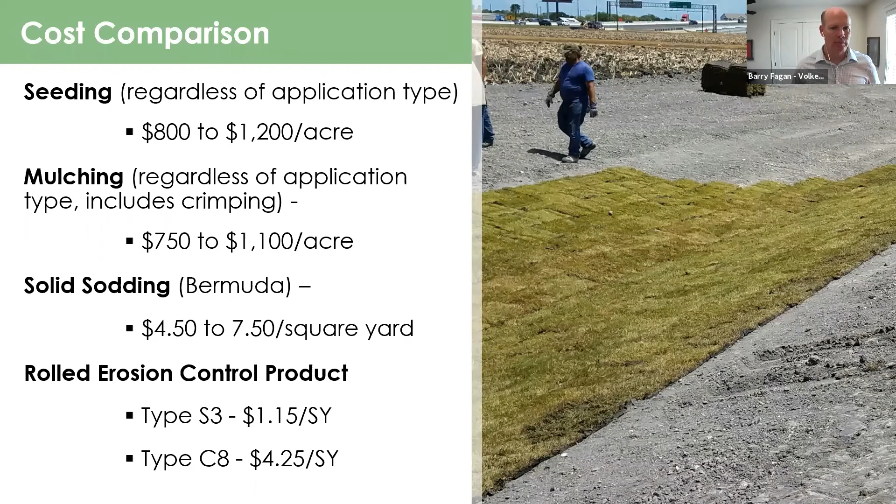Quickly looking at an example: if we got a 3-acre site on a 3-to-1 slope, and we want to seed, you're looking at $800 to $1,200 an acre, so let's take the average, about $1,000 an acre. That's a $3,000 fee to seed those 3 acres. Then add in your mulch on top: 3 acres at $925, about $2,700 total. So between the seed and the mulch, you're looking at just under $6,000 for that 3-acre site.

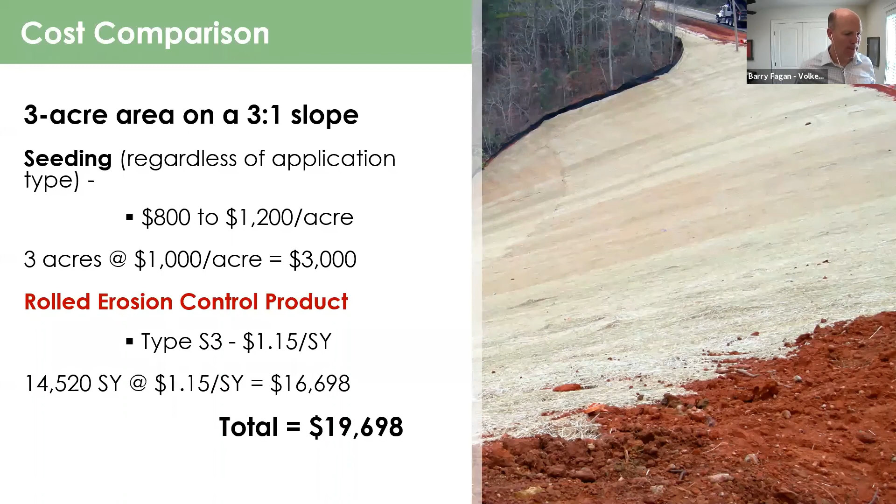Now, if we compare that to adding a rolled erosion control product instead of using mulch, let's say we put that type S3, you're looking at almost $17,000 for that rolled erosion control product. So you've increased your cost significantly, and your total cost here for the 3-acre site would be about $20,000.

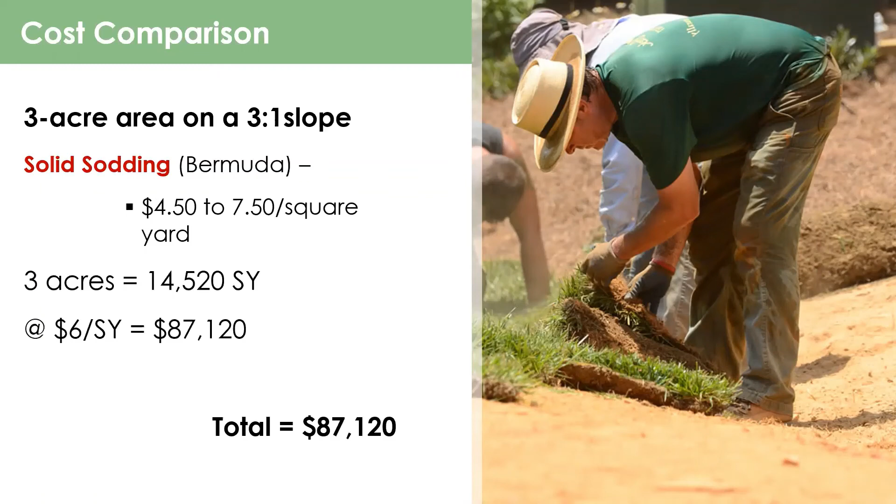The last option we have is sod. 3 acres equals 14,520 square yards. If we take the average cost and call it $6 a square yard, you can see your cost for sodding is about $87,000.

Comparing those three, you can see your cost goes up significantly. A 3-acre site, $87,000 for sod can be a lot of money, especially since in some parts of rural Alabama you're able to purchase an acre of land for $2,000. Your stabilization cost goes up significantly, and when you compare that to just the acquisition cost, there's a huge difference there.

But the question becomes, is it worth it? What if the receiving water downstream of your project is protected? What if it's a drinking water source? What if you don't get paid until the notice of termination is accepted by ADEM, or until the property sells? At that point, is it worth investing more in getting establishment a little sooner? What if there's an incentive in your contract, or you can save $15,000 in time and materials? There may be other benefits to getting the site stabilized and established quickly.

I wanted to wrap up by revisiting our learning objectives. Now that we've gone through this session together, you should be able to explain the function and role of vegetation within the stormwater management plan, describe the state of practice for minimizing soil disturbance and preserving vegetation, and apply the principles and processes to design project phasing, preserve vegetation, and manage topsoil on your site.

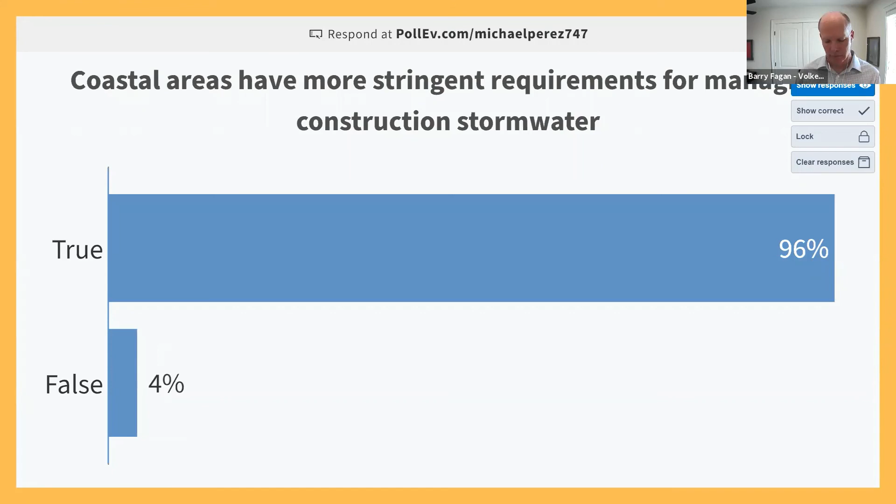First question: do coastal areas have more stringent requirements for managing construction stormwater? As most of you are responding, yeah, that is true. We have the SARSA, CZARA, and those regulations for Mobile and Baldwin counties within the construction general permit.

Three reasons to manage construction stormwater: we talked about the land, the blank, and the law. And that's right - it's the water.

We talked about the 5 pillars. Let's see how many of you can organize the list here correctly. This is a little different on your phone - you have to drag these options around, but see if you can remember what the proper order is of the 5 pillars of construction stormwater management. These are in the order of effectiveness.

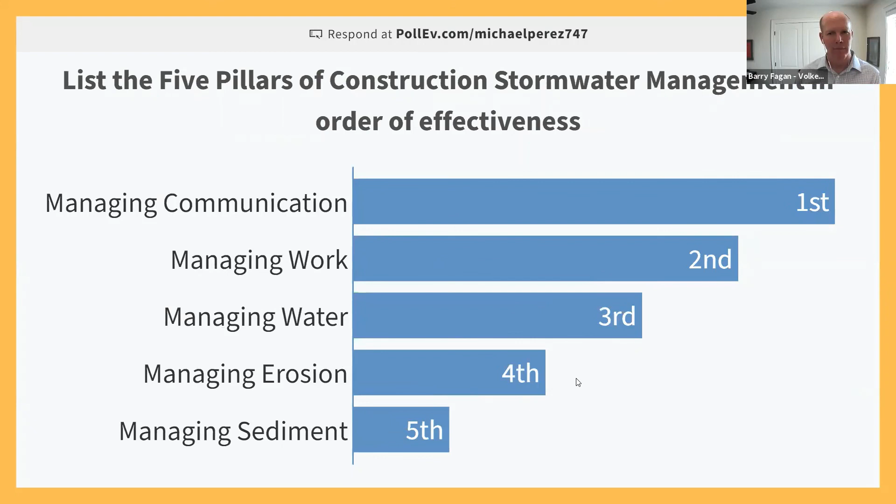All right, yeah, and that is correct. So managing communication, managing work, managing water, managing erosion, and managing sediment, in that order. Nice work.

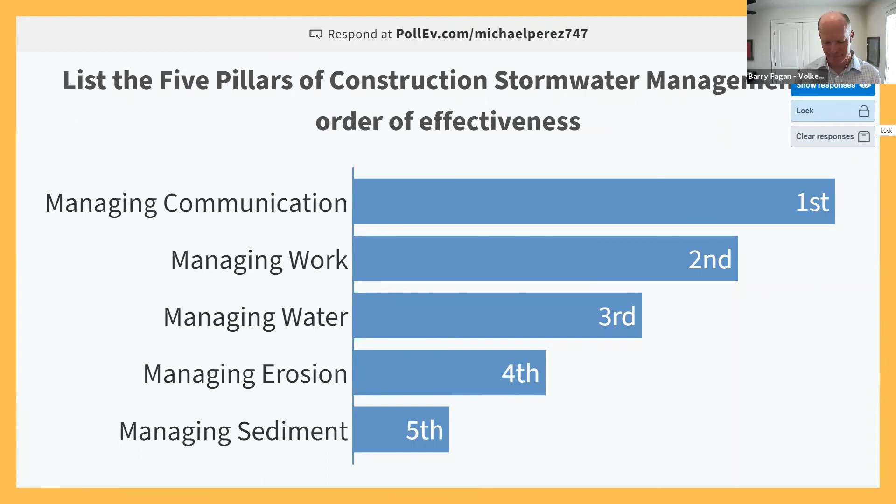So to learn more about managing construction stormwater, what are your options? You can reference the Blue Book or the Alabama Handbook, join the Alabama Stormwater Association, attend the next 2 workshops in this series, or all of the above.

So that would be all of the above. Use the Blue Book as a reference, use ALDOT as a reference, join the Alabama Stormwater Association to put on great events. Today they've got a session with ADEM talking about the new changes to the permit, the construction general permit. That'll be this afternoon.

We do have 2 more workshops in this series. We'll be talking about 3 practices: sediment barriers, inlet protection, and construction exit pads. That'll be on Friday at the same time, 9 o'clock. And then next week we'll have a session on sediment basins. So please join us for those 2 as well.